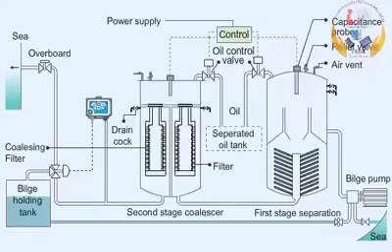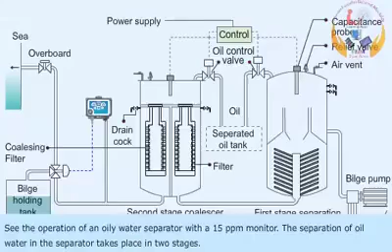Oily water separator. See the operation of an oily water separator with a 15 ppm monitor. The separation of oil and water in the separator takes place in two stages. In the first stage, the separation is by gravity, whereas in the second stage, the separation is by coalescing filters.

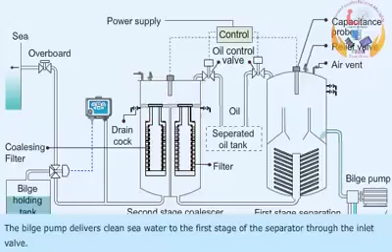Bilge pump delivers clean seawater to the first stage of the separator through the inlet valve. The vent is kept open till all the air is removed from the separator and water issues out. Oily water is delivered to the separator. As it enters through the inlet valve, oil separates by gravity and collects at the top of the separator.

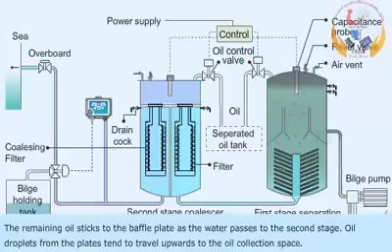The remaining oil sticks to the baffle plates as the water passes to the second stage. Oil droplets from the plates tend to travel upwards to the oil collection space. Oil from the top of the chamber is automatically drained to the oil tank, when the level reaches the bottom of the sensor as shown.

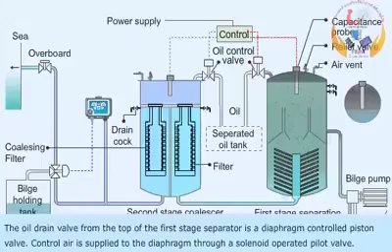The oil drain valve from the top of the first stage separator is a diaphragm-controlled piston valve. Control air is supplied to the diaphragm through a solenoid-operated pilot valve. The capacitance probe senses oil quantity in the collection space and energizes the solenoid through the control switch.

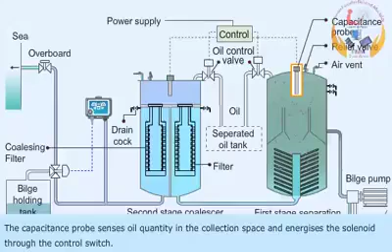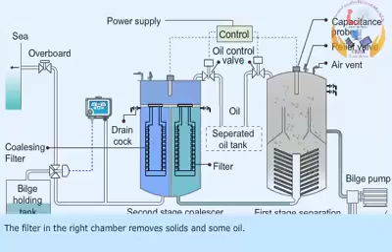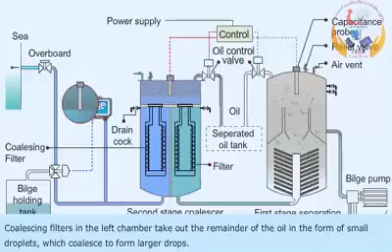Water passes downwards from the first to the second stage coalescer through a central pipe. The filter in the right chamber removes solids and some oil. Coalescing filters in the left chamber take out the remainder of the oil in the form of small droplets, which coalesce to form larger drops. These rise to the oil collecting space. Oil content of the final discharge is below 15 ppm.

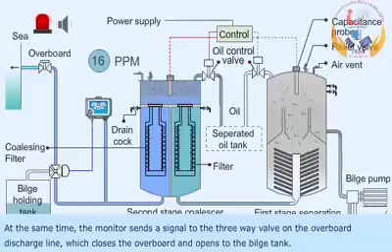In case the discharge of water after the second stage is more than 15 ppm, the monitor senses this and gives an audible and visual alarm in the engine room. At the same time, the monitor sends a signal to the three-way valve on the overboard discharge line, which closes the overboard and opens to the bilge tank. The sensor reverts to normal operation once the oil content drops below 15 ppm.

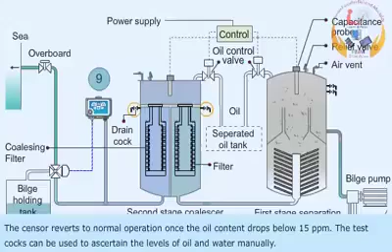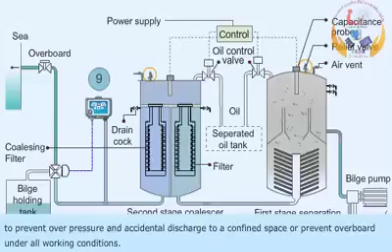The test cocks can be used to ascertain the levels of oil and water manually. A spring-loaded valve is usually fitted on both discharges. However, it is essential that a relief valve be provided on the shell or incoming mixture line to prevent overpressure and accidental discharge to a confined space or overboard under all working conditions.

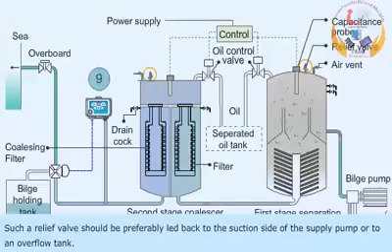Such a relief valve should preferably be led back to the suction side of the supply pump or to an overflow tank. The usual working pressure for the separator is in the region of 2 bar, that is, the pressure at which the spring-loaded water discharge valve is set. The relief valve is set at approximately 2.5 bar.